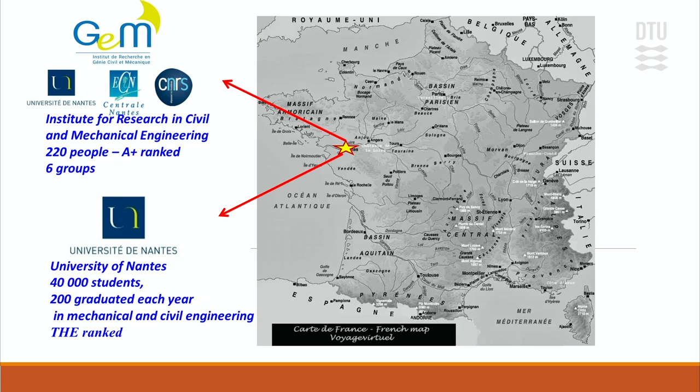So I'm not very proud about the title because it's not very clear, but I hope after the presentation it will be more clear. So we come both from the Nantes University, on the west coast of France. We have a joint laboratory between University of Nantes, École Centrale de Nantes, and CNRS. In this laboratory there are six groups, and the group I'm from is working on this subject.

So today we will speak about gamma models and risk-based inspection, so more about gamma models. We work on time and space-dependent degradation modeling and computing. Goal-oriented sensors, what we call Eshelby fiber optic sensors, that allow us to measure 3D stress in concrete, 2D patch fiber optical sensors, and sensors to assess spatial variability in concrete.

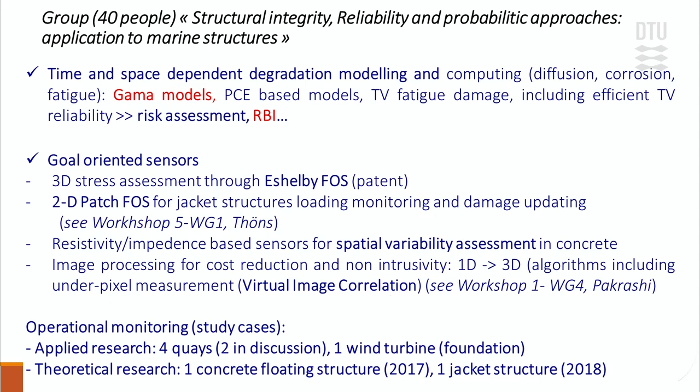And we work on operational monitoring too. So that's study cases, mainly with quays and wharves. One wind turbine, and next year and the year after we will probably monitor one concrete floating structure and one jacket.

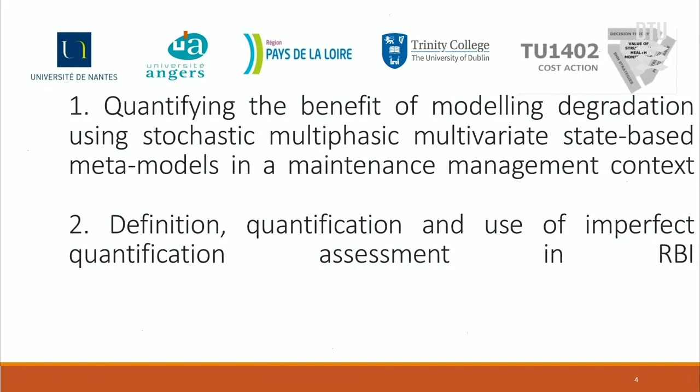Okay, so we share this presentation in two steps. The first one will be presented by Boutros, and the second by me. They are both related to the imperfect quantification assessment. I mean what we call the error measurements, incomplete and imperfect measurements that are due to technical, human, numerical limitations, and of course epistemic uncertainties, and that contribute to an estimation that you have already seen.

So Boutros will speak about that. And this one could lead to bad decisions if we cannot filter it. The first presentation showed us how to identify that, but if we cannot, of course, it could lead to bad decisions, and I will focus on it.

So it's about quantifying the benefit of using multivariate and multiphasic degradation using stochastic processes. Currently I'm engaged in a short-term scientific mission between the University of Nantes and Trinity College Dublin, where I'm hosted with Professor Alan O'Connor.

We're working on how to take into account erroneous databases or erroneous incoming data in the prediction and the improvement of prediction of degradation. And we also consider environmental affected parameters, such as climate change, for example. So first, the context of this work. The pathologies treated here are mostly, for example, corrosion. They are slow processes in time, and they are multiphasic.

So we have different phases, but generally, as we saw in some of the applications of SHM, we focus on one measurement, such as crack width. But in reality, we have different indicators, and all of them are related to the same failure, for example failure of the structure or initiation of corrosion. So we have different indicators that reflect this, and these indicators have different tendencies.

So if we take into account all these indicators, we also need to figure out the correlation and the tendencies of these indicators. If we use, for example, two indicators to model a degradation, we can have many benefits. We can model unobservable degradations, where we have a sort of potential of degradation inside. For example, corrosion motivates the cracking, but it's rarely taken into account.

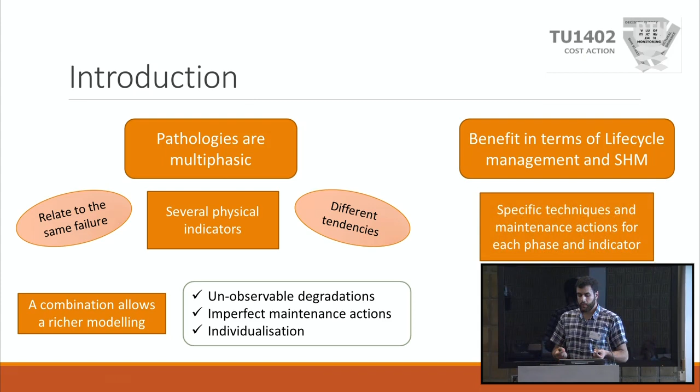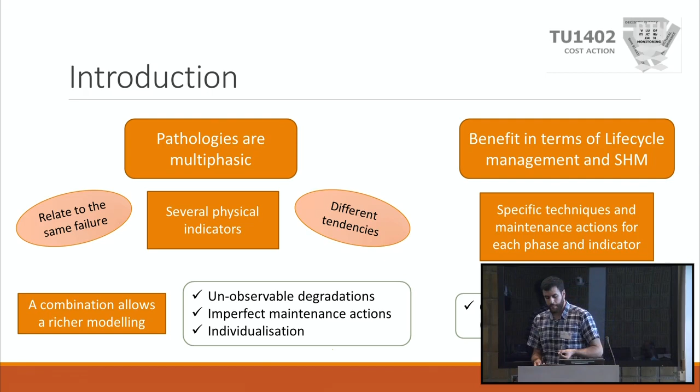If we discretize the pathology into its major phases and look into indicators in each phase, we can catalog different inspection techniques and specific maintenance actions for each phase, which will help us optimize the monitoring, where we can find, for example, the type of monitoring or quality that is enough for us to quantify or optimize the monitoring and the life cycle.

So first, I'll introduce the state-based meta-models, which allow us to take into account different indicators and correlate them using a formulation of stochastic processes. Meta-models are based on three big elements. In the first element, we have degradation analysis, where we look into the pathology, what constructs it and how many phases. The aim here is to give physical meaning to the processes we're trying to model.

The second phase is we give the appropriate stochastic processes and the correlation functions between the indicators to respect the tendencies. The third one is we analyze the maintenance. How can we inspect them? Can we inspect the indicators via SHM or not, and do they impact decisions?

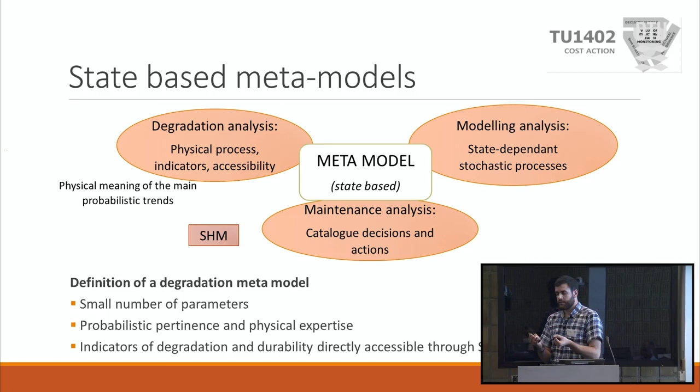To define the approach, the aim is to arrive at a small number of parameters. For example, we modeled chloride-induced corrosion, where the cracking phase in current physical models has about 50 parameters, whereas in the formulation of stochastic processes we can go down to 9, which is helpful in calibrating models. Second, meta-models are based on probabilistic pertinence and physical expertise. Third, they are based on indicators of degradation and durability directly accessible through SHM.

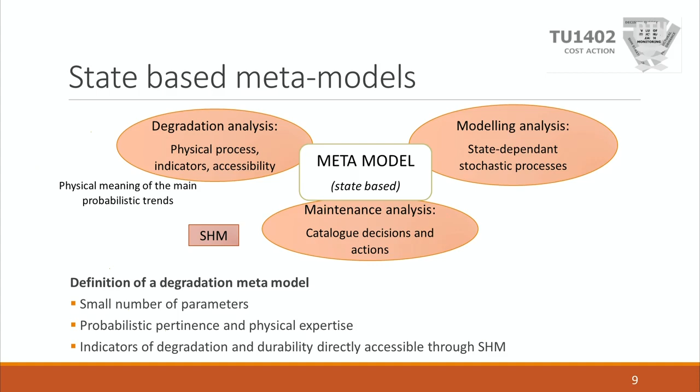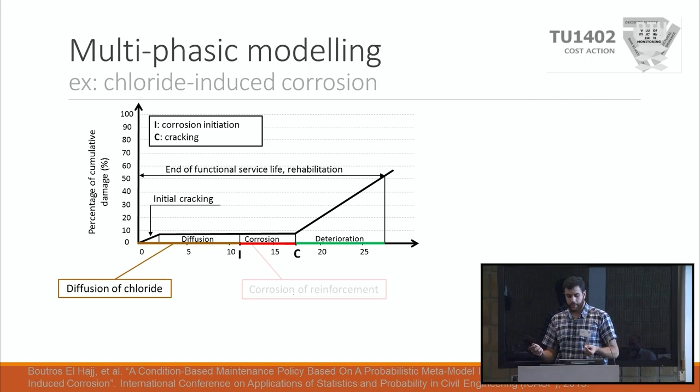Here I will show a fast example: chloride-induced corrosion. We have three phases: diffusion of chlorides, corrosion initiation, and the cracking deterioration phase. What if we were to model each phase using two physical indicators that we call rho and theta, where rho is the condition indicator? For the deterioration phase, rho will be the crack width and theta the corrosion current density. The choice is based on their accessibility via SHM and how much they represent the process, so how much they impact decisions.

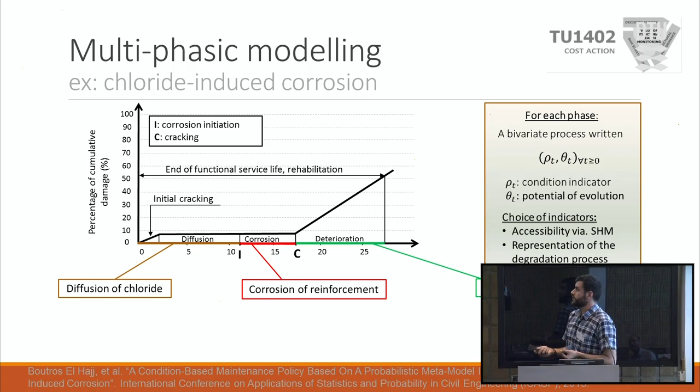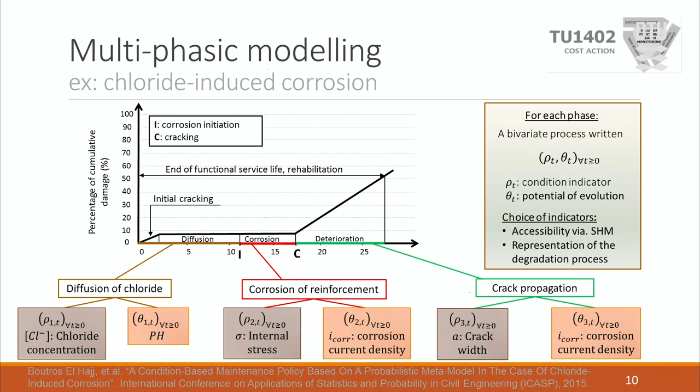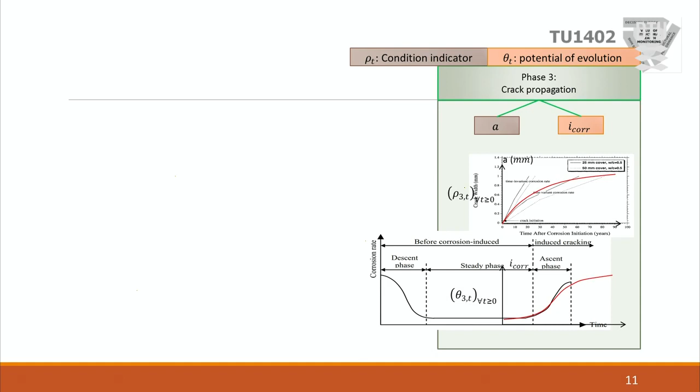For this pathology, we have these physical indicators which we can inspect, and they give the most valuable knowledge for each of the three phases, so we can adequately predict or calibrate the models. The second step was to give the stochastic processes to respect the patterns of degradation or the tendencies. We can find in the literature or from data sets how this type of indicator will evolve in time, and we can make the model respect this.

So we have for the first phase these tendencies, and then to model the transition between phases, we put a threshold on rho, the condition indicator. For example, there we have the chlorides, the second one is for ultimate tensile strength, and then for the third phase we have the crack limit fixed by Eurocode, because we will focus on this one for failure. We can notice similar shapes between tendencies: L shapes and S shapes. This will help us a lot in calibrating or mathematically formulating the model.

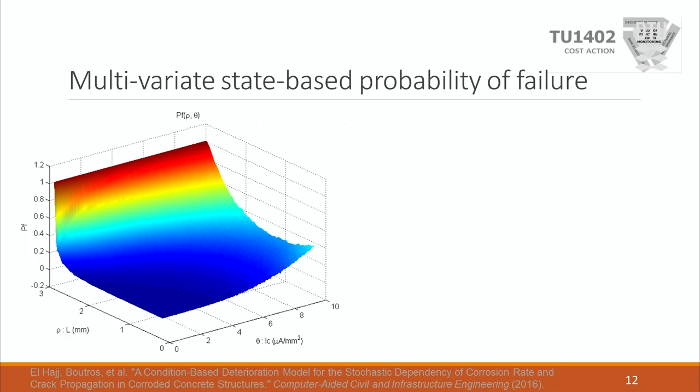One interesting result from using multivariate modeling of degradation is that we can calculate bivariate quantities such as the probability of failure in the next interval based on these two observables. If we inspect the structure for these two indicators, we get a probability of failure as a function of the state represented by them. This changes the way we look at decision making, which mostly was based on one indicator, for example crack width: above it, it's not safe; below it, we're safe.

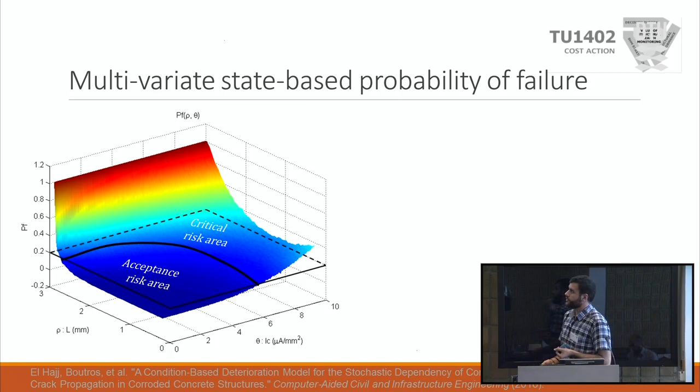For example, we have states joined by the same probability of failure, so we have a contour. Below it we have an acceptance risk area; above it a critical risk area. Compared to the traditional approach with one limit, we see two regions of inadequacy. For example, with the Eurocode, if we are below a certain level of cracking, we might be at a high corrosion current density, meaning degradation will grow faster, and this can be considered not an accepted risk area. Over there, we are above the crack limit but below the contour, so the same analysis can be done.

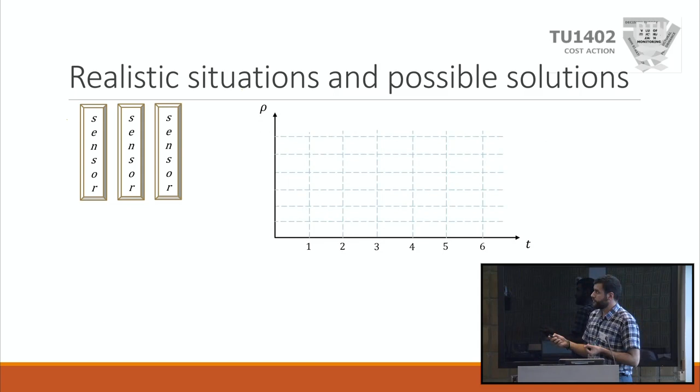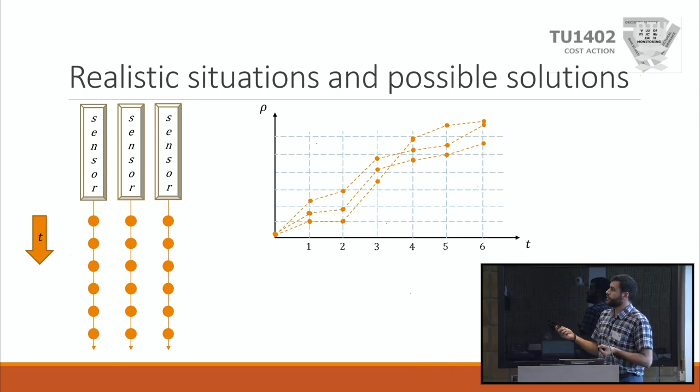One of the benefits of using this approach is we can benefit from the stochastic nature of the model. For example, if we have 3 sensors recording information over time, this information might suffer from erroneous data, such as...

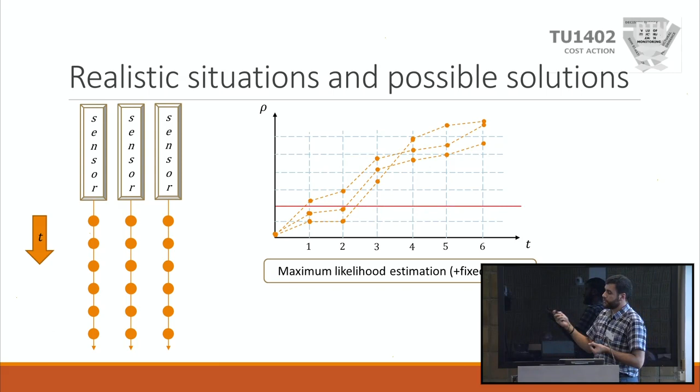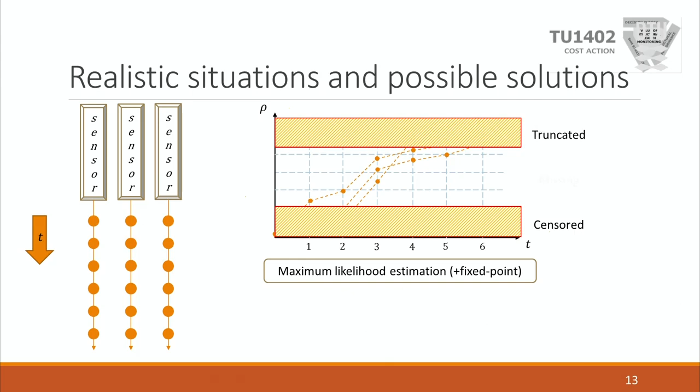If we have all points, we can estimate the model using maximum likelihood estimation. However, we might suffer from erroneous data, such as censorship. We are below the detection of the machine, or truncated by the machine, or the sensor stopped working, or we have missing points due to a faulty cable or something.

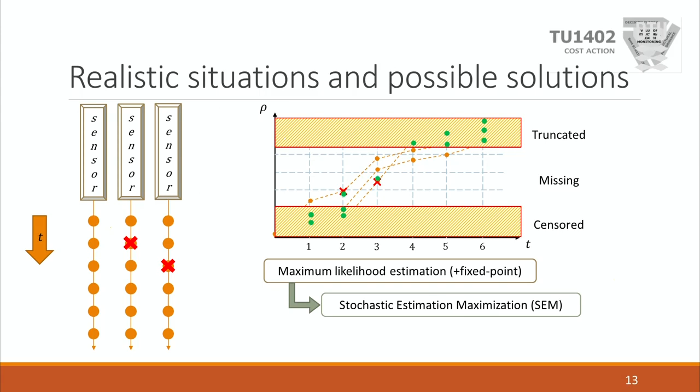This is one of the benefits of using stochastics: we can benefit from algorithms such as stochastic expectation maximization, which allow us to estimate the missed or erroneous data based on the current data we have, and this will allow us to better fit the model to predict the degradation. So it will increase our confidence in the degradation prediction.

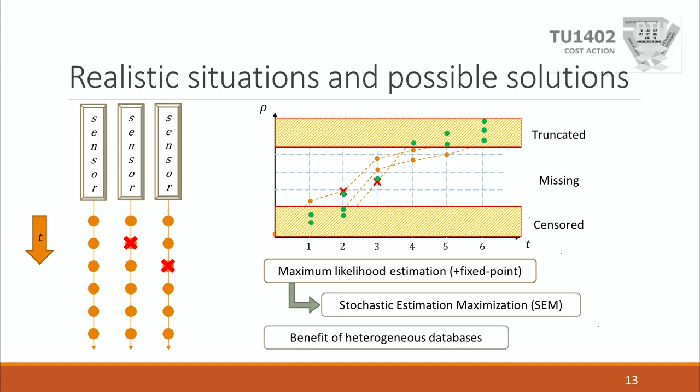Another approach will be to benefit from heterogeneous databases. This is where, for example, we have a family of structures with recordings, and for some reason the sensors on the structures stop working. But at the same time, we have a next structure which is similar in environment and function, and we installed a new set of sensors. So we might benefit from the new set of sensors to ameliorate our confidence in the prediction of degradation. So this will end my part of the presentation.

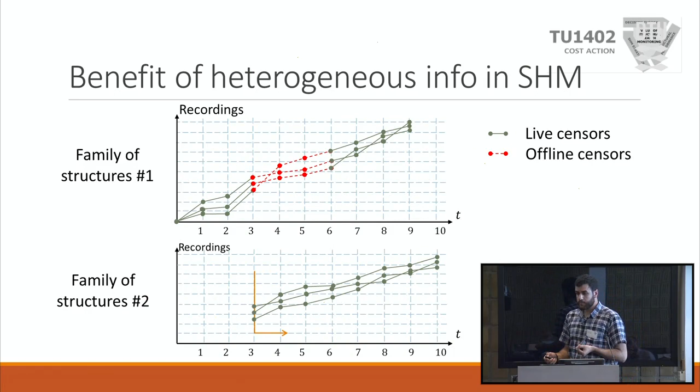I'll give back the micro to... No, not this one.

So the second and last part will be shorter. I will only remind a few things about the probabilistic modeling of SHM results when you have error.

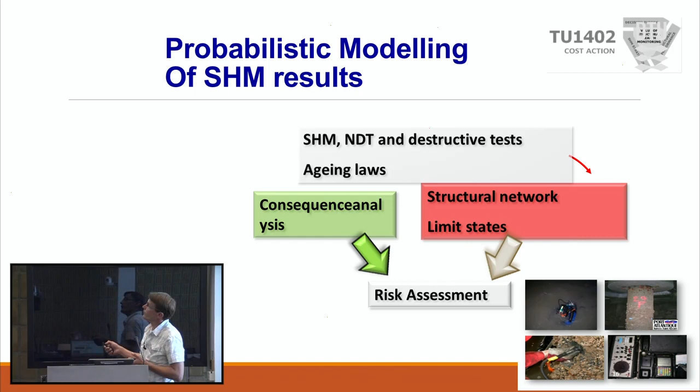So we start from the SHM system and non-destructive testing. We have a consequence analysis and a structural network with limit states, so the mechanical model, and it allows us to compute or analyze the risk.

And if you have harsh environments, or a lot of errors in your systems, bad detection exists. That could be the detection of a non-existing defect, or the non-detection of an existing defect, and that will lead to bad decisions, mainly overcost, unnecessary repair, or failure.

So there are some concepts already published by John, Michael, and other people that allow us to quantify that, and I only want to remind of that today.

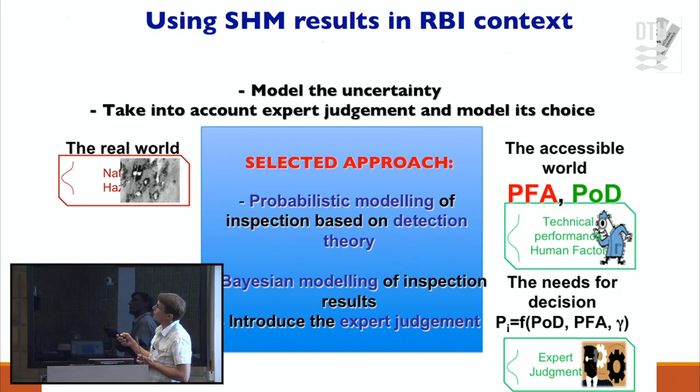So the two main concepts we will first focus on are the probability of false alarm and the probability of detection. I'll start from a very simple example, only to illustrate that.

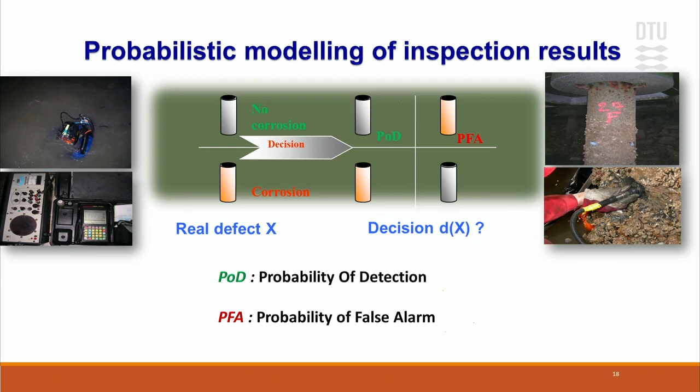So how do you compute that? How do you assess this probability of detection and probability of false alarm? There are mainly two ways.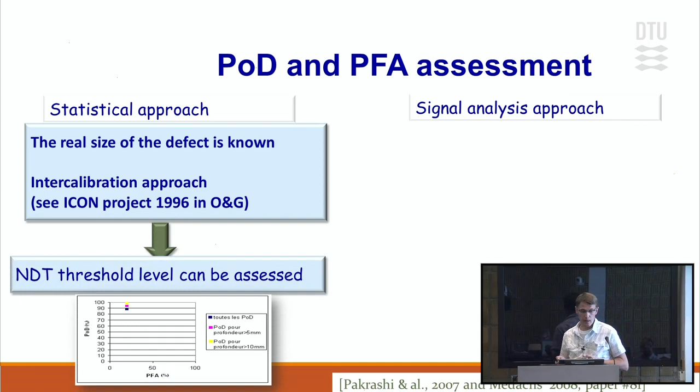The first one is a statistical approach. You know the real size of the defect, and you measure this defect with your system. That's very costly because it's an inter-calibrated approach—you need to put that in the field to account for the uncertainty due to the field and reality. It was performed in the ICON project, a JIP project from 20 or 30 years ago, and I think there's been no more such project since, so it's very, very costly. Of course, you can define the non-destructive threshold level by doing that.

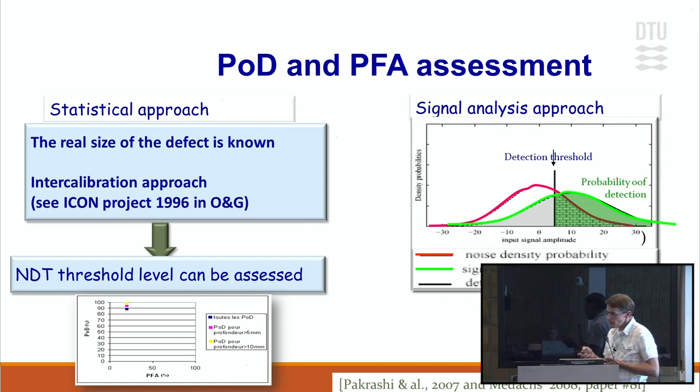So the second one is the signal analysis approach. You know what the noise density probability is and the signal-plus-noise density probability, and you have a detection threshold somewhere here.

So the probability of detection is the probability that the signal-plus-noise density is more than this detection threshold. And the probability of false alarm is represented by the bricks here—that's the probability that the noise only is more than your detection threshold. To use that, you need an assumption on the real value of the real defect, because you have to know what the error is, so you need a reference somewhere.

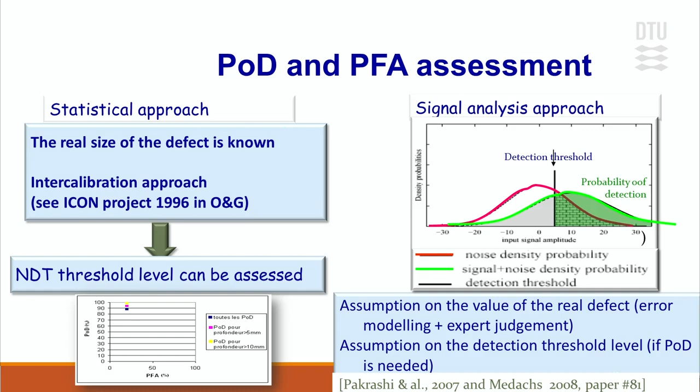Error modeling: what is the distribution, and what are the expert judgment and assumptions on the detection threshold level, if you want to quantify this probability of detection. I will illustrate that now.

We start from the distribution of errors shown in red, which does not change depending on defect size. As we increase the defect size with a constant standard deviation, of course you detect the defect more and more easily, and the probability of detection is almost 1 in this situation.

If you want to consider false alarms now, you have to consider one of these situations, for instance the third one, and move the detection threshold. In that case, you change both the probability of false alarm and the probability of detection. By moving in this direction, you decrease the probability of false alarm, but also decrease the probability of detection. So there is an optimum.

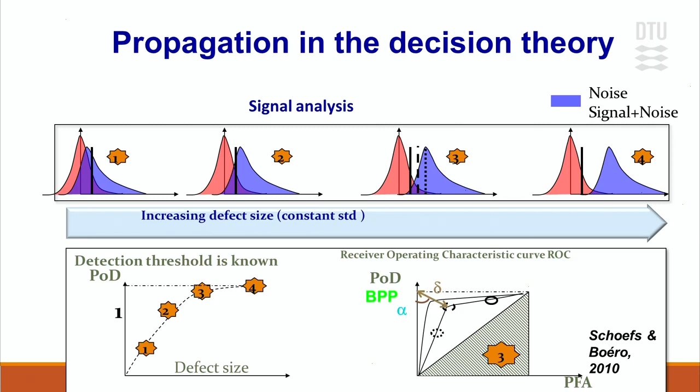That optimum is the point closest to the best performance point, with probability of detection equal to 1 and probability of false alarm equal to 0. This can be parameterized, and you can analyze its effect on risk-based inspection. The whole curve here is the receiver operating characteristic curve, called ROC.

So what we have in the lab is the NDT or SHM NDT optimal performance, but that's not very useful on its own. You need on-spot checking to assess how easy the NDT is to use, and factors like the divers, for instance if you have corrosion, and the topside operator, affect the probability of detection and probability of false alarm.

But what we need is not the probability of false alarm or detection, but other probabilities that I will define now. These probabilities feed into the decision theory, allowing us to account for bad decisions, good decisions, and their consequences. So what are these probabilities?

I'll illustrate only two of them, P1 and P2. What is needed by the owner is not the probability to detect something that exists, but to decide that something exists, knowing that it has been detected. That's the inverse in terms of conditional probability in the Bayes theorem.

You can compute the probability that there is no defect, knowing that you decided there was no detection, and the probability that there is no defect, knowing that you made a detection. This depends on the probability of detection, the probability of false alarm, and the probability of crack or corrosion presence. That's why these gamma terms were introduced before.

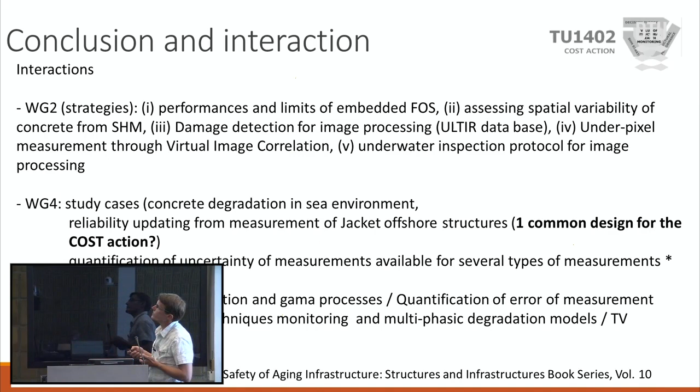The interaction I've seen is with WG2. As you've seen in my team, we have some papers about the performance and limits of embedded sensors, fiber optic sensors, assessing spatial variability from SHM, damage detection from image processing, and sub-pixel measurement through virtual image correlation and underwater inspection.

When we look at study cases, we have several because we carried out instrumentation and monitoring of structures. I had a question I already asked Sebastian: quite a lot of people here are working on jackets, offshore structures, wind turbines, and so on, and I was wondering if we could have one common design for the COST action, to compare, benchmark, and put our sensors on this virtual or real structure.

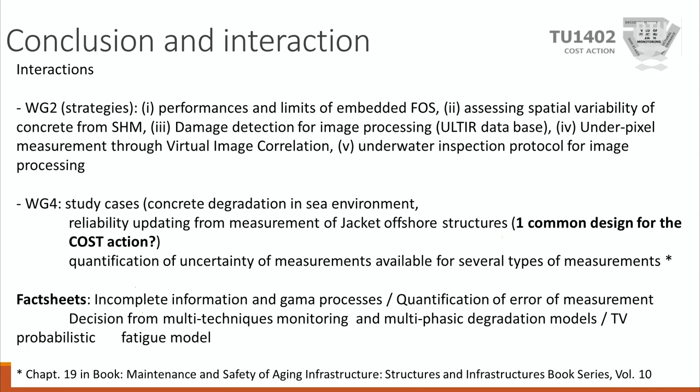That's the fact sheet I want to propose. If you want more information about quantification of uncertainty, I have a chapter in a book with some examples, and we can put that into WG4 too.